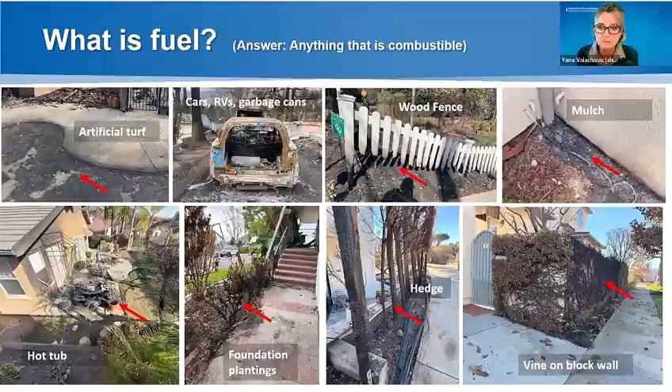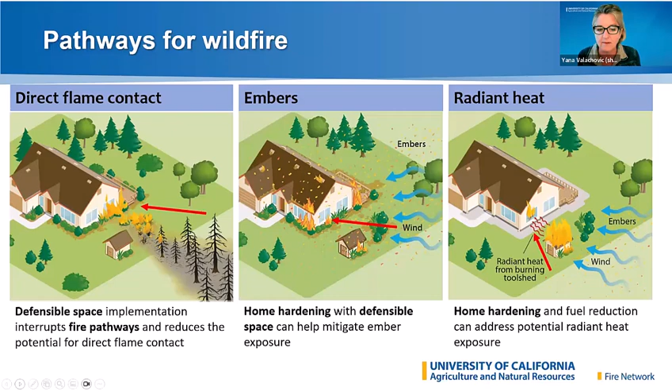So really what I want to bring forward today is this multiple pathways approach between direct flame contact, embers, and radiant heat, and try and help navigate through those to be able to more explicitly talk about where mitigations can happen, how we do that through defensive actions by fuel reduction, known as defensible space, as well as some elements associated with how we harden the structure. There's no one element. You can't just do fuel reduction. You can't just do home hardening alone. Both of those actions need to happen in tandem to be able to reduce the potential exposure from all these three types of fire possibilities.

So to break it down, and this was inspired from some of the work I did in Altadena and Palisades. The idea is that we often get an ignition somewhere else. It can be lightning, it can be a power line, it can be an escaped campfire. And what that leads to is a fire in the wildland, which starts moving through the vegetation. We often have events that have wind behind them, and that's where our crews and resources are more challenged because they're focused on evacuation as the primary and first response.

So you get fire moving through the vegetation. At some point, it gets closer to our communities, whether they're wildland urban interface communities or even communities like Altadena and Palisades, where the fire transitions from the wildland to our near to home environment, sometimes through a wooden fence, sometimes through vegetation, and that allows that direct flame contact to run towards the structure.

If there's wind behind it, as I was suggesting, you often get embers moving. Those embers then are getting moved long distances, sometimes as much as a mile or more, and they start to exploit vulnerabilities in the interiors of our communities. And we get ignition of buildings that are maybe far away from the initial flaming front. And there can be multiple pathways where you get multiple points of ignition happening simultaneously.

Again, other fences or other vegetation allow the fire to sort of wick along that fuse directly towards the structure. And then when you get structures ignited, you get a lot of radiant heat and you can get that house to house event. So what I'd like to do today is really talk about how we break those pathways and really can build in some more resilience into our communities.

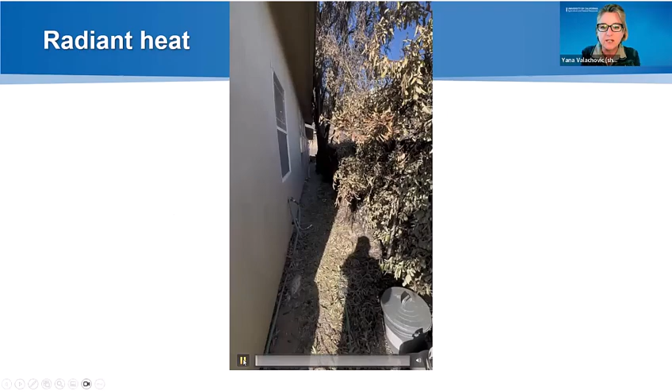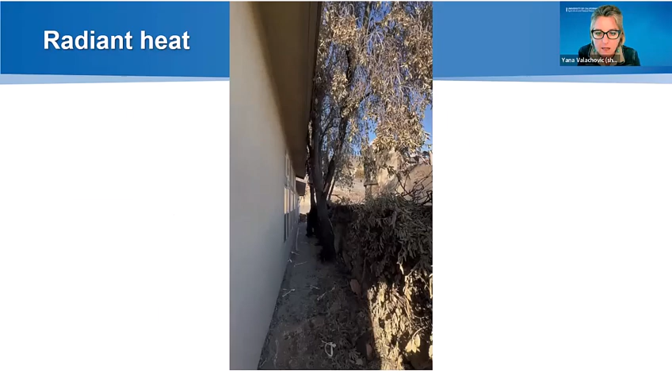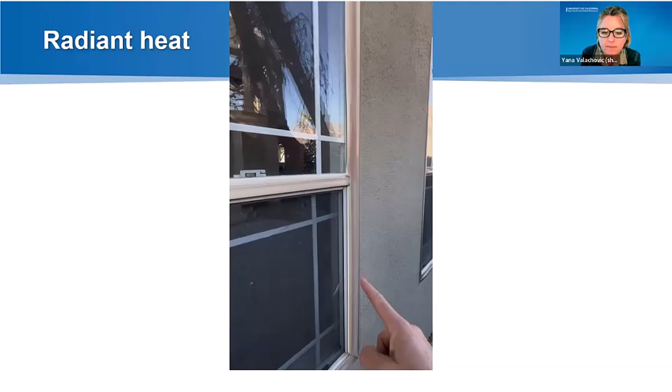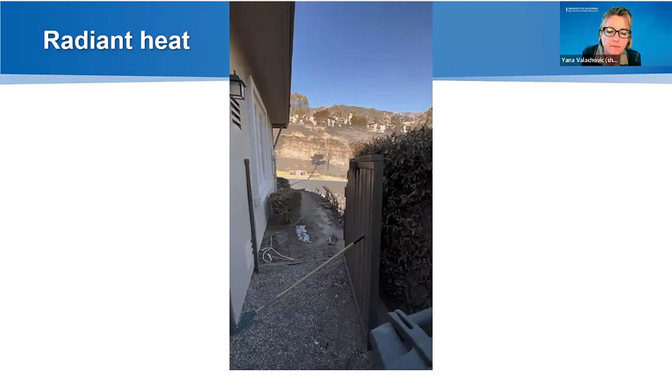I'm going to start by just sharing a video from, I think this is Palisades here. Halfway between the two buildings, you can see that the trees got involved and the trees led to a lot of heat exposure onto these windows. Here's where the window pane is on its way out because the glazing has melted. And you can see the breakage up there. These look to be annealed glass. I don't see the tempered glass bug, and you can tell by the way that the window is cracking. And then over here, the gate ignited.

So some of what I do is really kind of fire chase and follow the path of destruction to be able to look at opportunities like that, to see what was the pathway and what was happening in that example. So what I'm trying to bring forward is really this coupled approach where we're talking about vegetation and other combustibles on the property, their selection, their location, and their maintenance, really bringing forward a concept of right plant, right place, right care.

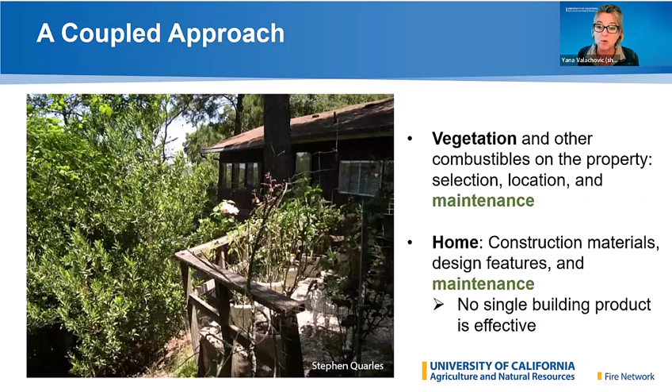And then again, thinking about the structure itself, its construction materials, its design features, and again, how do we maintain them? If I can give you any message today, there's no single building product that is 100% effective. Just because you have stucco siding or just because you have a metal roof, it takes more than those things. So those are great elements, but it takes more than that overall.

So why do we have to change? And I know as master gardeners, there's a lot of conversation happening about changes in policy in California. And so I just really want to bring forward a couple thoughts here. At this point, structure loss is accelerating. At the time of this recording, we've lost in the last decade over 57,000 structures. That's a huge amount of people's lives just extinguished overnight. We're seeing that the fire season is really lengthening. Fires are happening throughout the year. They're occurring in all parts of California in a whole lot of different vegetation types. And we're seeing the same pattern time and time again.

It's really these events where we get a lot of wind behind them that is really overloading the fire services system, and the focus becomes on protection of life and evacuation and less on structure protection, just because there's not sufficient resources, especially when we have multiple ignitions happening simultaneously in the state. And so, we have to really be thinking about what that means for us, and how can we be a reliable partner with the fire service during these really intense experiences.

This has led to home and business insurance being heavily destabilized. And I think probably many of you in the room may have experienced either increases in premiums or loss overall, and limitations to the FAIR plan. And that's led to major community, environmental, and economic disruption across the state. We are seeing changes and signs of hope. For example, there are now exterior building codes for new construction, but most of California's buildings were built before 2008 when the codes were adopted.

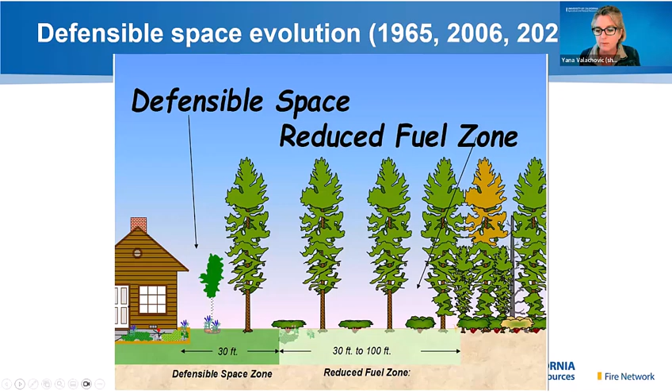But the graphic illustrations in 2006 really just reinforce this idea that it's a forest-related condition and we live in wood cabins in the woods, and continue to reinforce this message that it doesn't apply to all of California, when what we've seen is really not true.

What defensible space has been about is really creating a defendable space, so that it's a safe place for fire personnel to stage and be able to manage an approaching fire, such that the fire might come out of the crown, or the green part of the vegetation. It could be shrubs, it could also be tall trees as shown here, and it drops to the ground such that the flame heights are something that crews can directly attack. That's what defensible space has really largely been about.

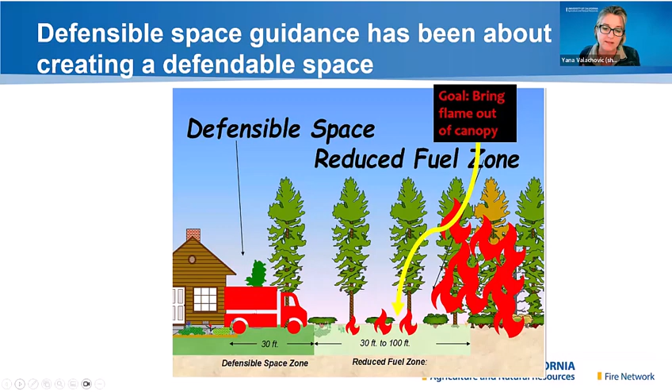And what we're seeing now is a great modernization of that to really reflect a different set of conditions and this element associated with embers as well as radiant heat. So that's where this modernization is coming from, and that's where Zone 0 is coming from. So we're now seeing the movement of a 3-zone system, which focuses on the first 5 feet of the structure as Zone 0, and then from 5 to 30 feet is Zone 1 and working outwards.

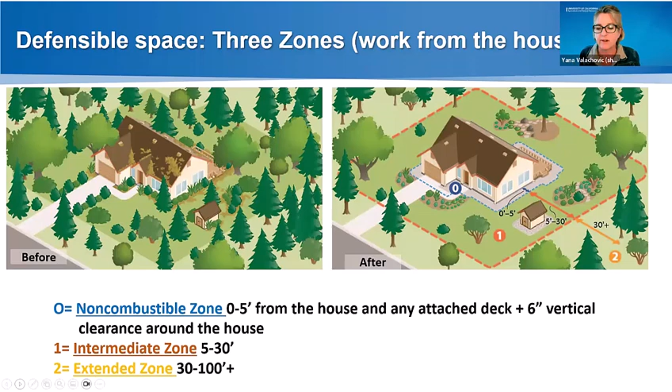And it's really in this new look to really try and work from the home outwards, and trying to figure out how you get that win-win of privacy, security, beauty, and fire protection overall.

So in the built structures, there are a lot of specific vulnerabilities, especially in roof to wall intersections, as well as the connected fences to the structure, and our rain gutters, which collect water, but they also collect debris, and embers land and create ignition within those gutters, as well as the vents, which are really key to the circulation system of our structures overall.

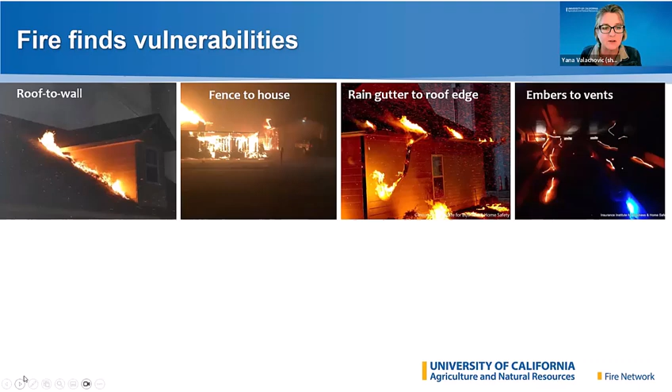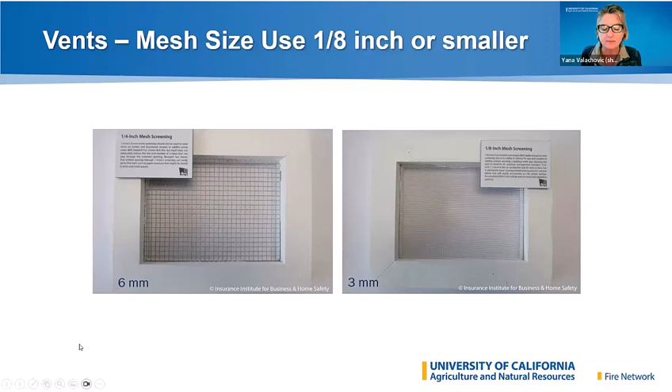The vents, however, are quite porous by design, especially to keep rodents out, but they can also let embers in. And so what you'll see is that we're really trying to promote this idea of a vent screen change from 1/4-inch mesh screen to 1/8-inch metal mesh screen so that it prevents the embers from getting inside of our structures. And this can be done through a variety of techniques, both adding screening to the vents you have now or upgrading to some new vents.

In the home hardening priority space, there are 3 primary priorities that everyone should do no matter where you live. We all need a good roof. We all need the vents to be able to resist those embers. And we all need to be thinking about the vegetation and defensible space, especially close to the structures.

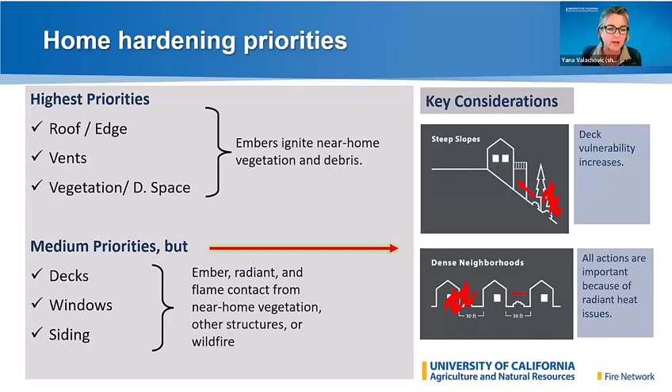There are some additional considerations when a building is on a steep slope or when structures are closer to each other, especially closer than 30 feet. And in that case, then the home hardening details associated with the windows and the siding really start to elevate in priority.

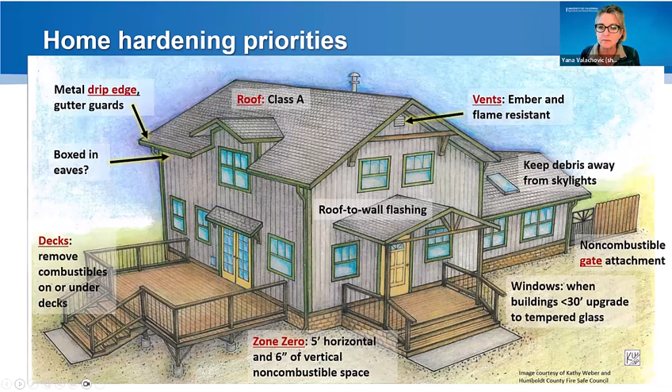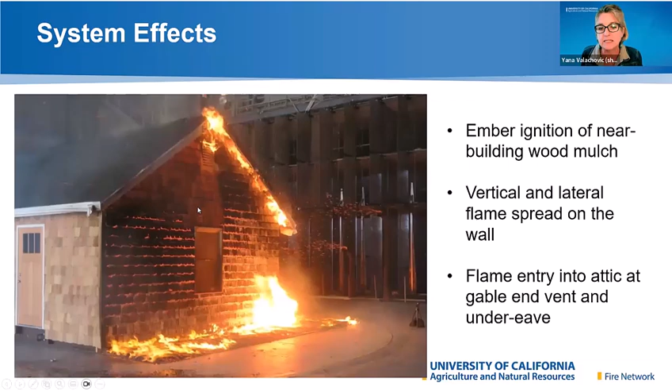But I want to just frame it, it's really a systems approach. And in this example, we've got a structure with combustible wood siding, and it's surrounded by some wood-based mulch. And what you can see is that we get ember ignition of that wood-based mulch, and that leads to both vertical and lateral spread of fire along the wall, and ultimately fire into the attic. And so, we're trying to think about this in a whole systems viewpoint. If the mulch is gone, it's likely that the structure itself will not ignite.

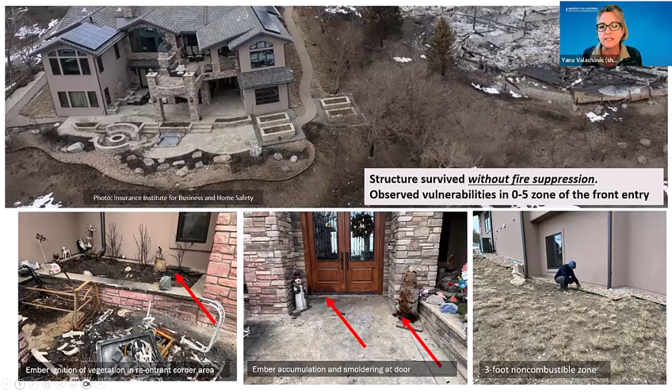In post-fire work, there are a lot of examples of where all these pieces are coming together and buildings are being challenged in the most extreme conditions. Here's one from Boulder, Colorado. And this structure survived without fire suppression, largely between the home hardening elements as well as that first 5 feet that did not transmit fire to the structure.

Here are 2 more examples of vegetation adjacent to the structure. In both cases, there was firefighter intervention that prevented continued transmission. Here you can see the ignition point here. Here you can see the ignition point here. Both of these are examples where, had someone not been there, I'm quite clear that both of these buildings would be fully destroyed.

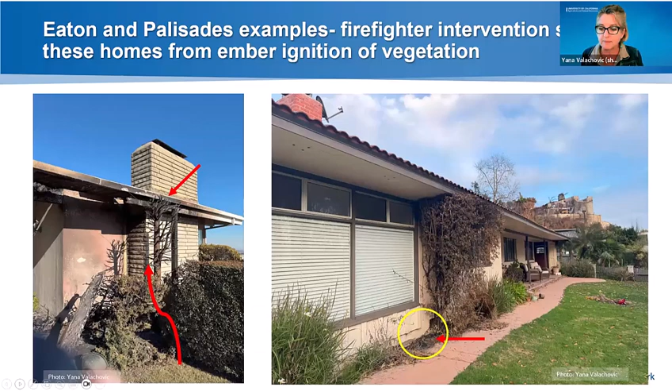So, what about plants? I only have a few more minutes to kind of talk about that. Plant placement is more important than plant type. All plants can burn regardless of how they're marketed.

And so, let's talk about plant flammability really quickly. Why is it hard? We've got a great piece of research by Beth Key, who's one of our UC colleagues, to look at plant flammability tests. And the problem is there's tons and tons of misnomers in this. There's lack of standardization. There's no standard test method.

We're not clear if the test method is focused on ignition or flame spread or heat release. There's lots of confusing definitions. Many experiments use common names, and it's unclear which species were actually evaluated. And really, the care in the region matters substantially more. And so I just want to bring forward this idea of right plant, right place, right care. And the care is the really critical component in all of this.

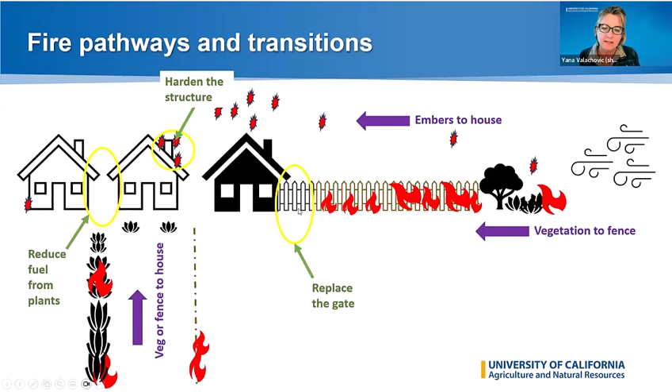And so just in conclusion, I showed you this slide earlier in the beginning, and it was talking about pathways and transitions. What we're really trying to get to is thinking about how we can break the wick, how we could add perhaps a metal gate here so that if the fire comes this direction, it's going to encounter a panel that's non-combustible and so won't transmit fire to the structure. How we can harden the structure overall so that if embers land, they really don't have a pathway in. How we can reduce the connectivity of fuels between structures and reduce the potential that we end up with ignition, and then from there that building to building spread.

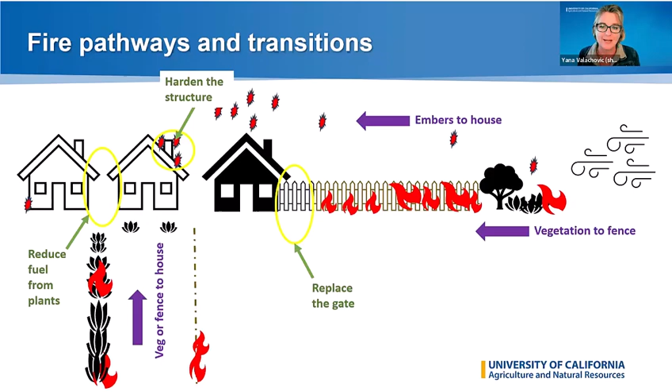So through a few small actions, we're hoping that overall we can really start to change the outcome in our urban communities, in our rural communities, and in all of California so that we can build and maintain that more fire adapted future. So I'll just wrap up by saying, in my mind, there's tremendous reason for hope, and really that master gardeners are super important messengers in this space.

And I hope that in this short amount of time, I've been able to help illustrate the fuel pathways and ways that we might be able to break the wick through gate transitions, removing fuel adjacent to the structure, and really gardening in a way that islands of vegetation are disconnected from other islands of vegetation. So it's not just a continuous fuel bed that enables fire to move throughout the whole landscape and then directly to the building. And at the house level, we can try and fix some of those vulnerabilities, understand what the importance is of the roof, the vents, and how we might upgrade windows where there's a radiant heat potential.

So that fire adapted future, I think, is one that's going to take some creativity, and I really hope that you'll join us in helping your communities think about what that can be for them and finding that win-win overall.